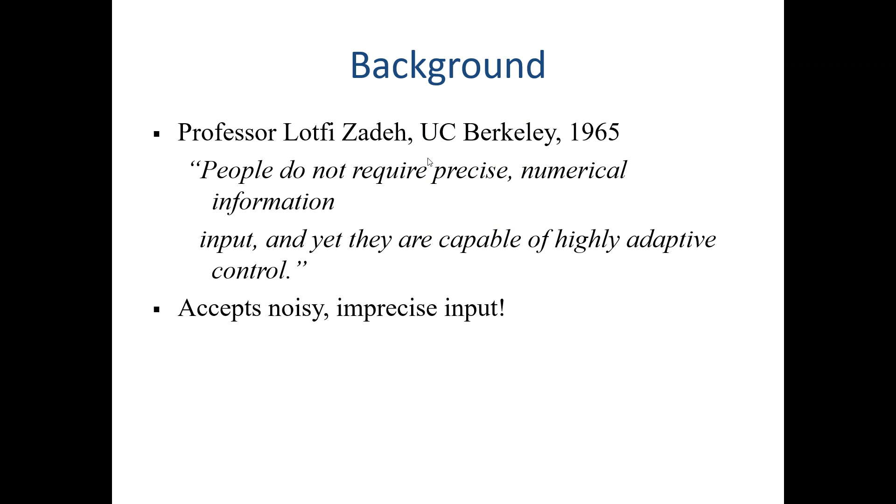As per the background, Professor Lotfi Zadeh of UC Berkeley in 1965, he was the author of fuzzy logic. Sabi niya, people do not require precise numerical information input and yet they are capable of highly adaptive control. So sabi niya, pwede raw tayo mag-accept ng mga noisy input, mga imprecise input, provided na meron tayong effective rules na implement for us to solve the problem. So yun na nga, kaya naisip niya yung idea behind fuzzy logic.

So let's define, ano ba ibig sabihin ng fuzzy logic? Pag sinabi natin na fuzzy, so not clear, distinct, or precise, blurred. And then yung definition ng fuzzy logic natin, a form of knowledge representation that is suitable for notions that cannot be defined precisely but which depend upon their context. So, ginagamit talaga yung fuzzy logic for nonlinear problems na mahirap i-solve linearly. Kaya po, meron tayong easier way to do that, which is the fuzzy logic.

So, ano po ba yung fuzzy logic? So, basically, fuzzy logic is a problem-solving control system methodology, and we make use of the linguistic or the fuzzy variables. Example, if the process is too hot and the process is heating rapidly, then meron tayong conclusion. So we have to cool the process quickly. So instead of using values, we represent that using linguistics or using fuzzy variables.

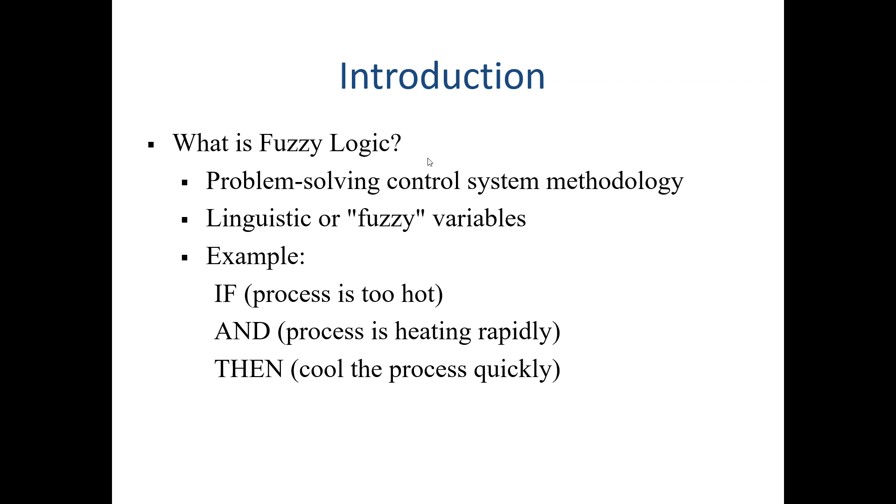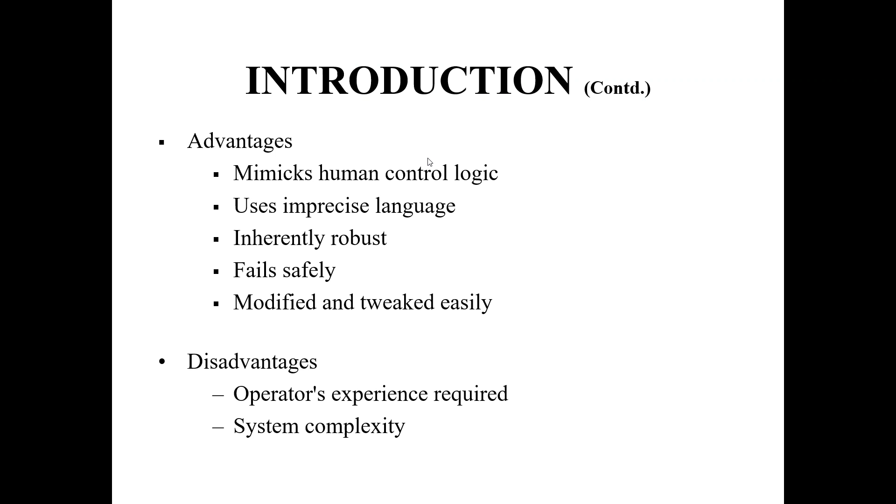What are the advantages? So basically, it mimics human control logic. It uses imprecise language, inherently robust, fails safely, and you can easily modify and tweak this one. For the disadvantages, kailangan dito ng operator's experience. Kailangan ng system complexity. So, kailangan mo talaga ng expert that you could ask or confirm whether okay na ba yung rules na atin pong iniisip.

Ito yung ating traditional representation ng logic. So, we make use of binary, di ba? 0 and then 1. So, in representation, yung snail, slow siya. So, ang speed niya 0. We could represent that as 0. And then, we have here fast for the cheetah that we could represent as 1.

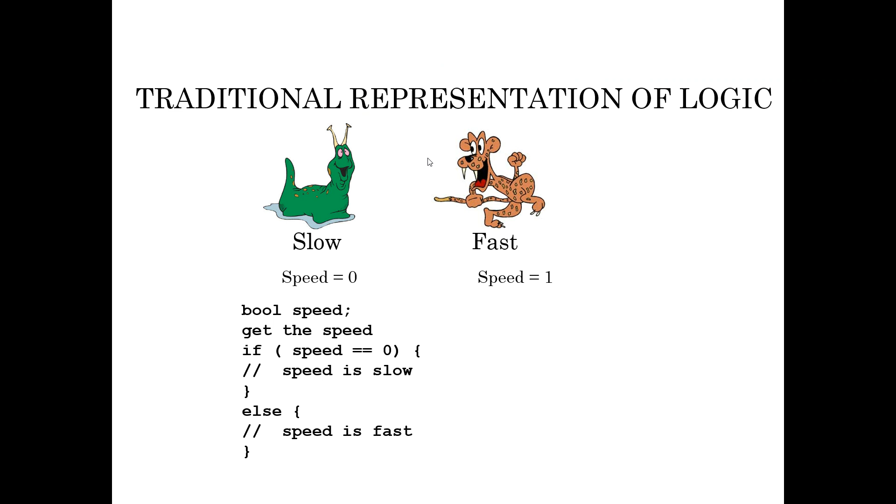So, kapag i-code natin yan, yung common sa atin, C or C++ or even Python, so i-declare natin yung speed as Boolean kasi it's a matter of 0 and then 1. Then we get the speed or we scan the inputted value of the user. And then we determine that if the speed is 0, so we just check the condition, then the speed is slow. Else, the speed is fast. So, ganun kasimple lang yung traditional representation natin ng logic.

So, in fuzzy logic representation naman, for every problem, we must represent that in terms of fuzzy sets. So, ano ibig sabihin ng fuzzy sets? So, this time, hindi lang tayo 0 and then 1. So, we could represent that into different linguistics like the slowest, slow, fast, and then fastest. So, pwedeng yung snail, ang kanyang category or range of values ay from 0 to 0.25. Then, syempre, yung turtle naman natin from 0.25 to 0.5. Then, fast yung dog natin from 0.5 to 0.75. And then, the cheetah, which is the fastest, from 0.75 to 1.

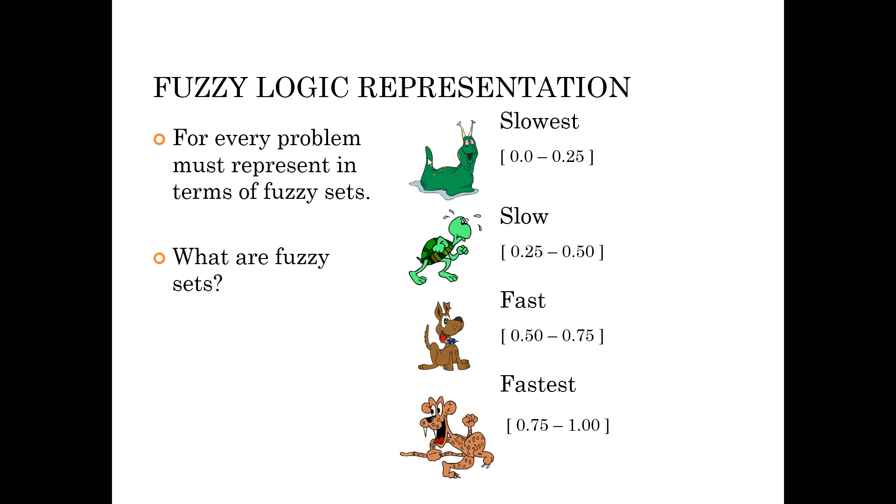So, if we are to make a programming language for this one, ganun din lang din naman yung representation. But this time, pwede natin na i-declare si speed as float, considering na hindi lang naman siya binary in nature na 0 and then 1, we still scan the input of the user, which is speed.

And then, this time, meron tayong range of values na gumamit tayo ng ladderized if-else. If the speed is greater than or equal to 0, and the speed is less than 0.25, so the speed is slowest. Then from 0.25 to less than 0.5, slow. 0.5 to 0.75, speed is fast. And then 0.75 to 1, the speed is fastest.

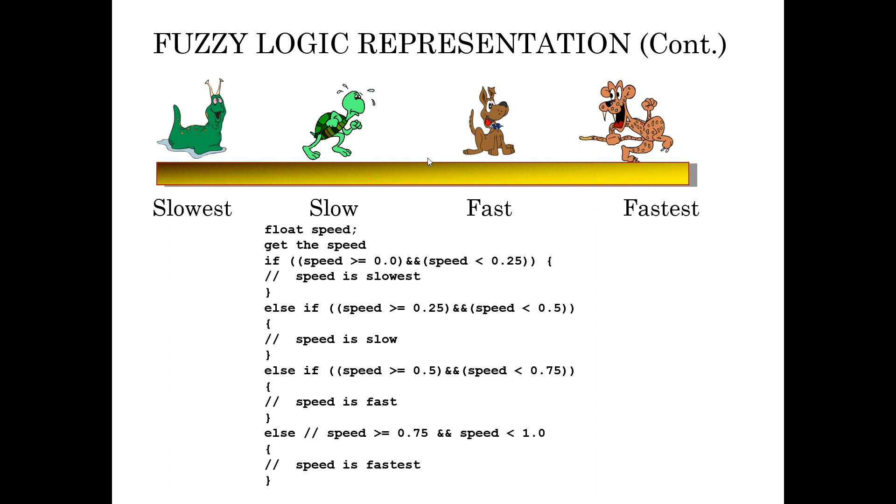So regardless of the programming language, pwede po natin gamitin si Fuzzy Logic. In our subject, since we're building model-based design, we'll try to use muna Fuzzy Logic Toolbox. So gagamit tayo ng MATLAB para i-implement si Fuzzy Logic in our 7th experiment.

So origins of Fuzzy Logic, so it traces back to ancient Greece. And then he was the first to publish the ideas of Fuzzy Logic. It was Lotfi Asker Zadeh. And I think he was the professor of my professor in De La Salle University when I'm taking my master's and doctorate degree. Naging prof niya to. Sa Europe kasi siya nag-doctorate.

And then in the Philippines, si Dr. Elmer Dadios, he was my professor and advisor also in Fuzzy Logic subject. Siya naman yung father ng Fuzzy Logic in the Philippines. And then we also have Professor Toshiro Terano in 1972. He organized the world's first working group on fuzzy systems.

Kaya nga marami na ngayon na mga organizations or conferences na related sa fuzzy systems. And isa ako sa mga nai-invite na maging reviewer ng mga papers na related sa fuzzy logic. I even presented papers naman related to that.

And then the FL Smidth Corporation in 1980, they were the first to market fuzzy expert systems. I don't know if you have seen already washing machine. Yung washing machine namin na isa, nakalagay doon Fuzzy Logic. Ibig sabihin, yung idea behind the algorithm in that washing machine is using the concept of Fuzzy Logic.

Ngayon, i-compare natin, there are a lot of computational intelligence. Normally, pinag-aaralan ito kapag nag-graduate school po tayo. So dito gusto ko i-compare yung Fuzzy Logic with the neural networks. So how does a neural network work? Tandaan po natin that both model the human brain. Both the Fuzzy Logic and the neural networks are both used to create behavioral systems.

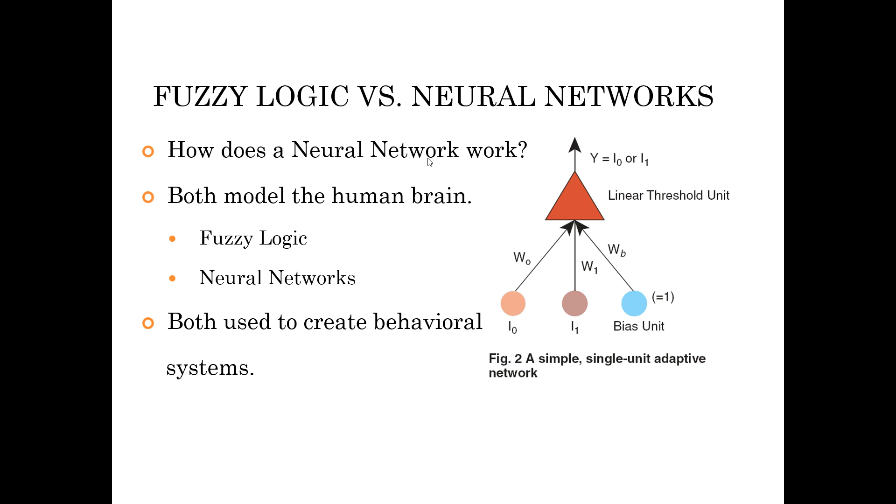For Fuzzy Logic naman, it's more of the rules. Iisip ka ng rules, aralin mo yung situation ng sistema. Pag clearly naintindihan mo na yun, you have to ask for the expert. And then, tutulong yung expert sa'yo para gumawa siya ng rules needed for your Fuzzy Logic.

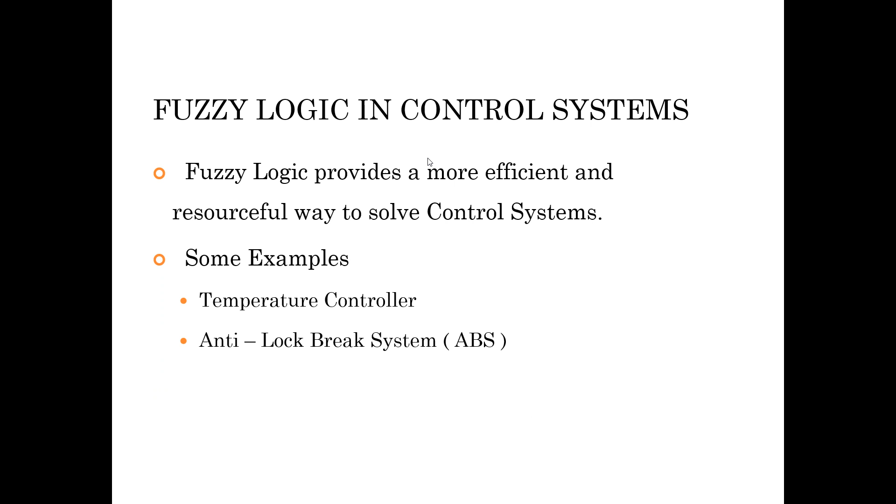So, yung Fuzzy Logic, pwede rin gamitin for the control system. It provides a more efficient and resourceful way to solve control systems, examples of which yung temperature controller and even the ABS or the anti-lock brake system. Common use po ito sa temperature controller. Example, we have the problem. We need to change the speed of a heater fan based off the room temperature and humidity, di ba?

Ngayon, mainit. So, kailangan ma-measure mo yung temperature at saka humidity doon sa room before you could adjust automatically yung ating heater fan or even the air conditioning system. A temperature control system could have 4 settings. In our case, we have the cold, cool, warm, and then hot. Again, ikaw po uli ang pwede magdagdag niyan. Pwede mo siyang dagdagan na very cold, cool, warm, hot, very hot.

Pwede po yon. So humidity can also be defined using 3 classifications, low, medium, and high. Again, pwede po yung magbago. Depende po yan sa design mo. So considering this classification, we can define now the fuzzy set. So in our case, we have the temperature.

Yan, the temperature is cold, cool, warm, and then hot. And then we have classifications for humidity, low, mid, and then high. And then yung output natin dito is the fan speed. Ang ibig sabihin lang yan, if the temperature is cold, and the humidity is low, then we set the fan speed to medium.

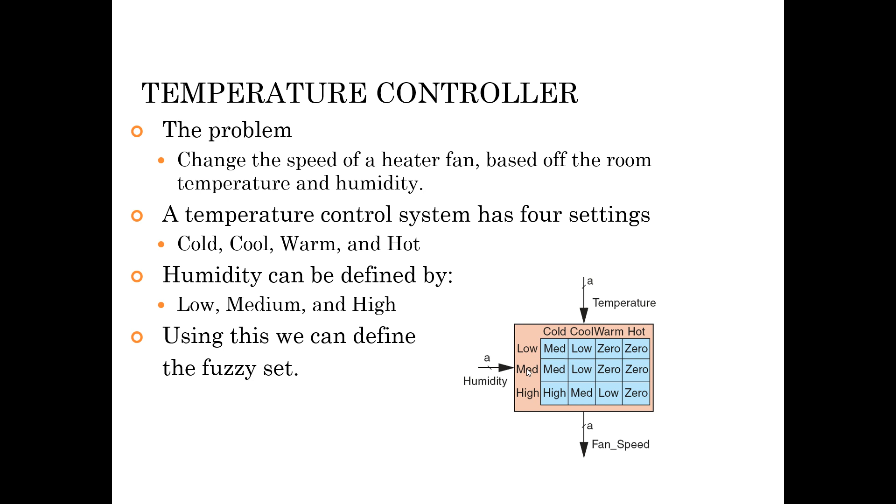Pero kapag the temperature is hot and the humidity is high, then we set the fan speed to 0. So, ang tawag dito sa nakikita po natin na table is Fuzzy Associative Memory Matrix or FAM matrix. So, yan na yung rule na na-create natin na hindi mo siya inisip, nonetheless, you ask someone na expert in the temperature control system.

So, ano po ba yung benefits ng using Fuzzy Logic? So, kita natin dito yung steps, yung traditional approach that we're using. Of course, lahat naman ginagawa natin yan. We understand the physical system and then the control requirements. Pero in the traditional practice natin, kailangan pa natin mag-develop ng linear model of plant sensors and then actuators. Di ba meron kayong subject na feedback and control system? Malamang familiar kayo pag sinabi kong sensors, actuators, and so on.

And then, we determine a simplified controller from control theory. So, medyo mahirap yan. Kailangan kang umisip ng control theory na applicable doon sa specific design that you are trying to build. Pwedeng proportional integral, proportional derivative, proportional integral derivative. And then, mag-develop ka ng algorithm for that controller and then you simulate, debug, and implement design. In most cases, kailangan mong gumamit ng differential equations, kailangan magkaroon ka ng advanced math, kailangan mag-derive ng equations para ma-solve mo yung problema.

Pero using Fuzzy Logic, kinombine natin yung development ng linear model of plant sensors and actuators, simplification of controller from control theory, and developing an algorithm for the controller. So, ang gagawin lang po natin, we need to design the control using the Fuzzy rules. And then, syempre, we have to fine-tune our rules. Kung enough na po ba siya, we simulate, we debug, and we implement the design. Ganun po ka-simple at ka-usable si Fuzzy Logic.

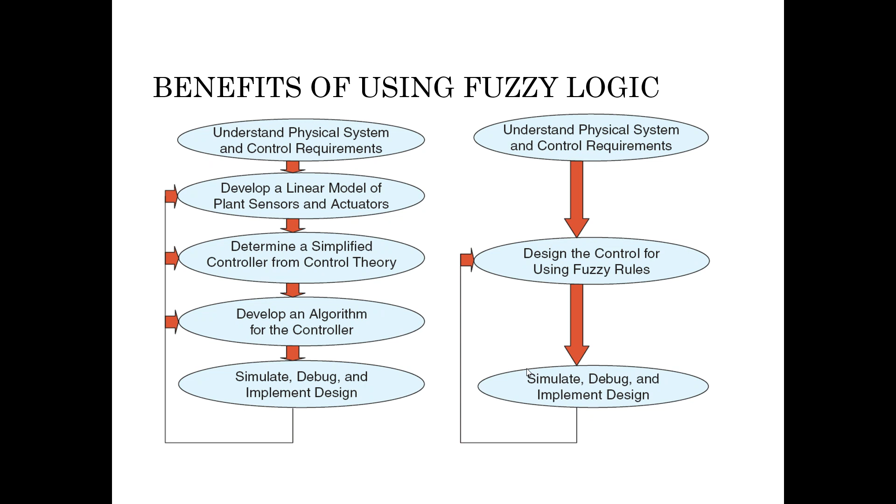So, another example, this time, for the anti-lock brake system or the ABS. So, this is nonlinear and dynamic in nature. So, kaya kailangan talaga natin ditong gumawa ng equations or gamitan siya ng Fuzzy Logic. So the inputs for Intel Fuzzy ABS are derived from the following. So we have the brake, the four-wheel drive, the ignition, the feedback, and the wheel speed. And then we have here the diagram for that. So basically those 5 items are the data input. And then ipoprocess natin siya using the main program, using the Fuzzy Logic Inference Engine.

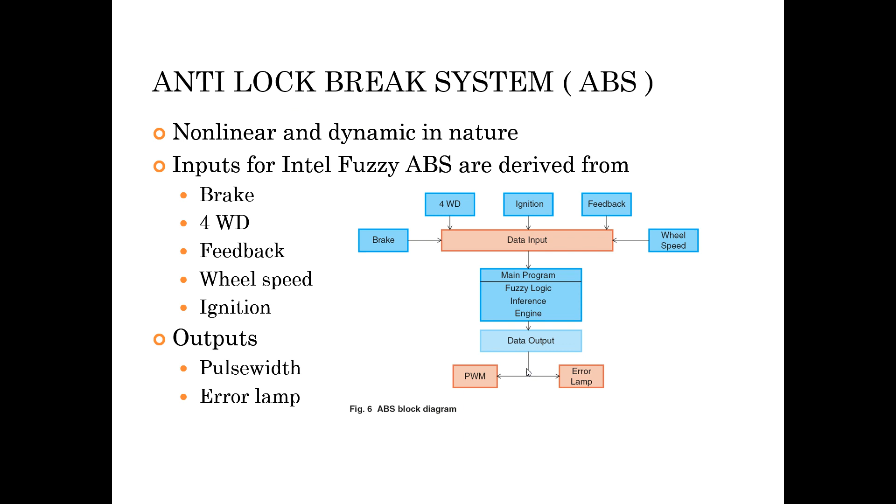So we have commonly used two, Mamdani and Sugeno. In my research works, I have used both naman, pero common na ginagamit ay Sugeno. In our case, gagamitin po natin ay Sugeno since we are just starting with Fuzzy Logic. Then we produce the data output. In our case, ang outputs po natin, pulse width modulation or the PWM and the error lamp. Yun yung i-control natin using the rules.

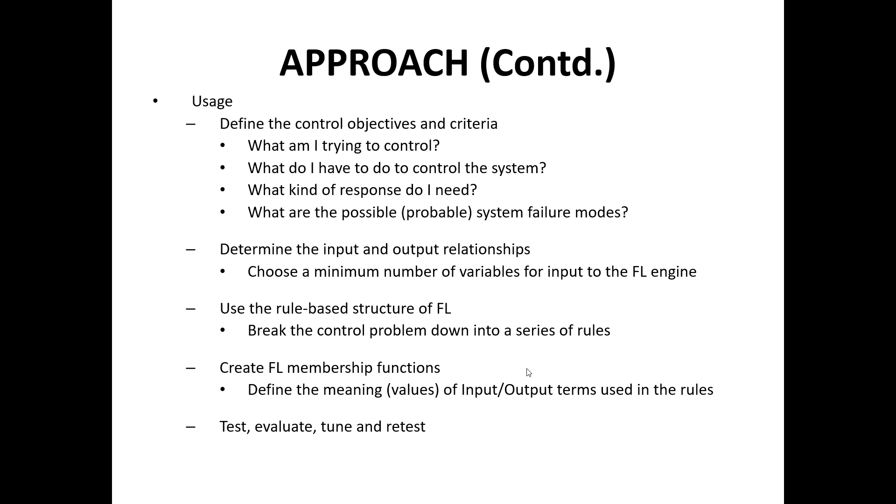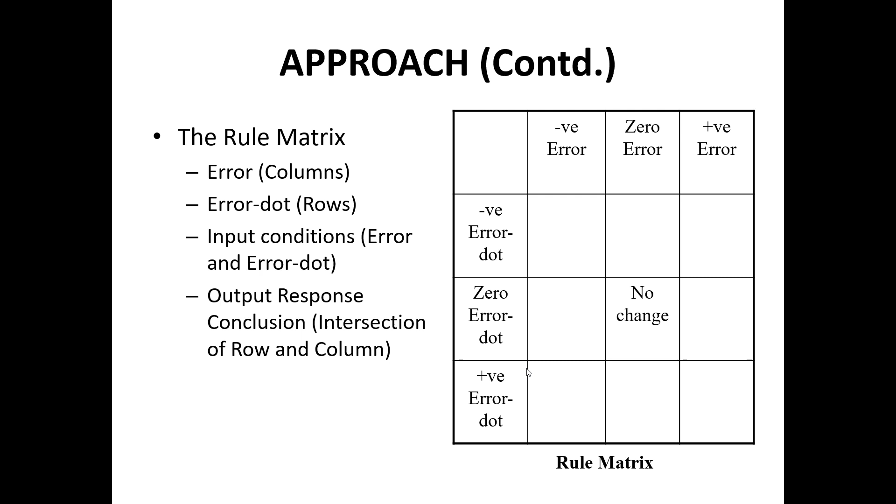And then gagawa ka ng rule matrix. Example of which, we have the error for the columns and the error dot for the rows. And then input conditions, error and error dot, output response, conclusion, intersection of row and column for the rule matrix.

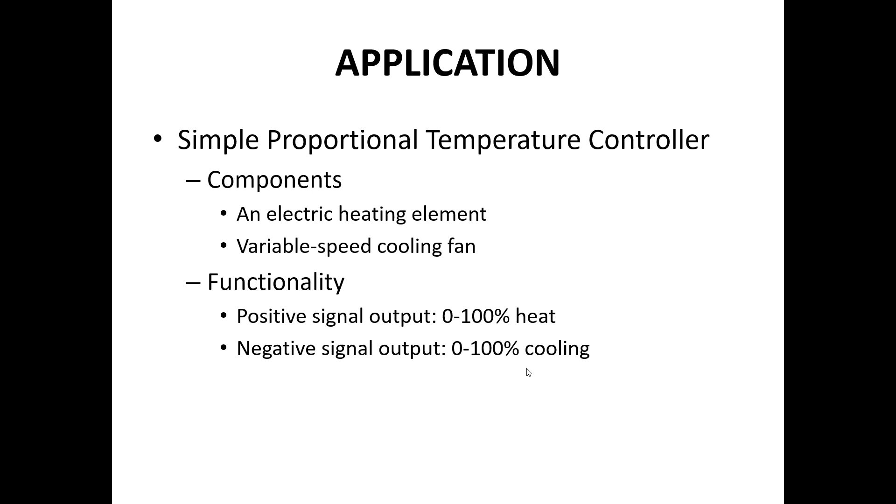As for the application, simple proportional temperature controller, so components of which an electric heating element, variable speed controlling fan or cooling fan, functionality, positive signal output 0 to 100% heat, negative signal output 0 to 100% cooling. So this is a block diagram of the control system for simple fuzzy logic control system.

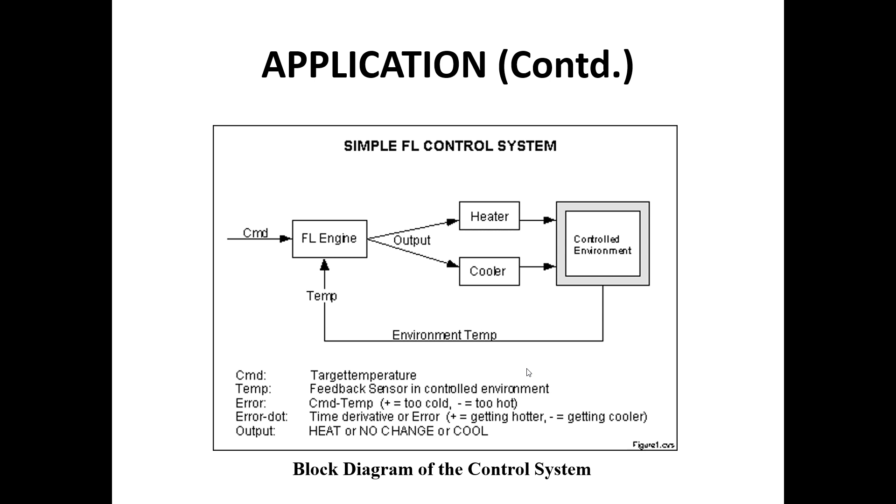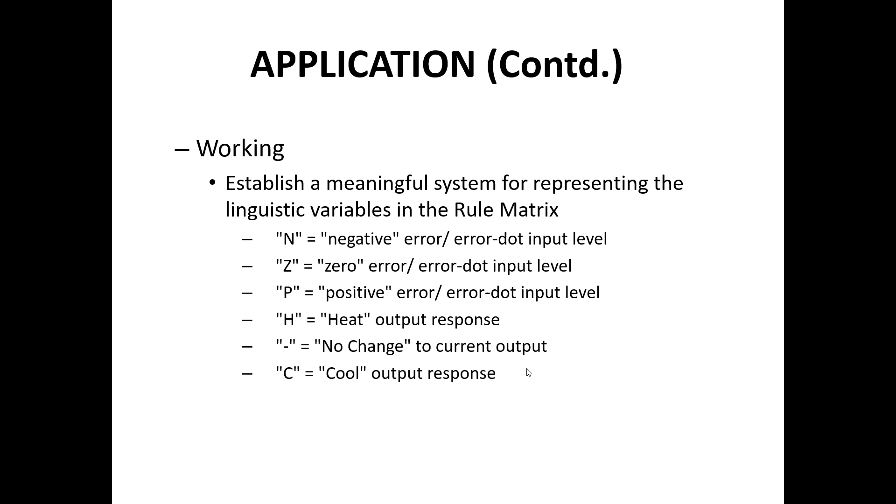As for the working, so we have to establish a meaningful system to represent the linguistic variables in the rule matrix. Pwede kang gumamit ng mga variable like n, which is ibig sabihin negative, p for the positive, h for the heat, dash for the no change, and then c for the cool.

So, we also have to define the control objectives and criteria. Ito yung mga sinabi ko kanina, what I'm trying to control. Example, what I'm trying to control, system temperature.

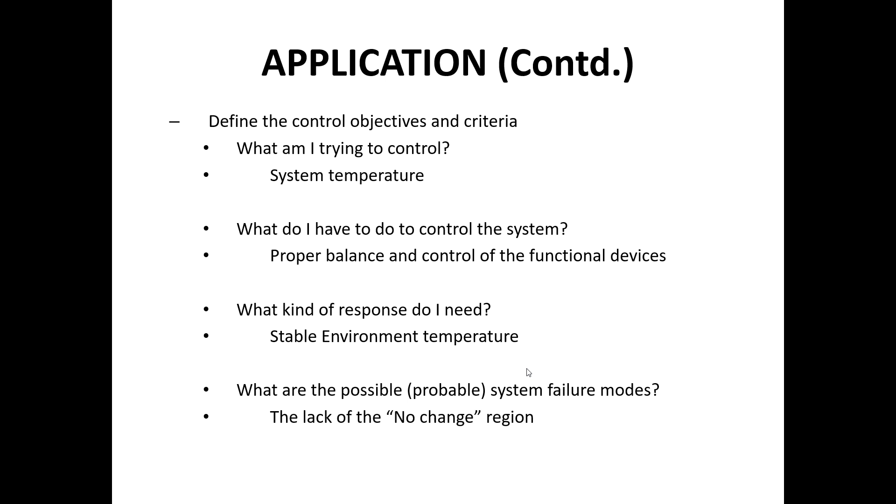What do I have to do to control the system? So, proper balance and control ng functional devices. Ano bang klaseng response ang kailangan ko? Stable environment, temperature. Possible probable system failure modes, the lack of the no change region. So, what is being controlled and how?

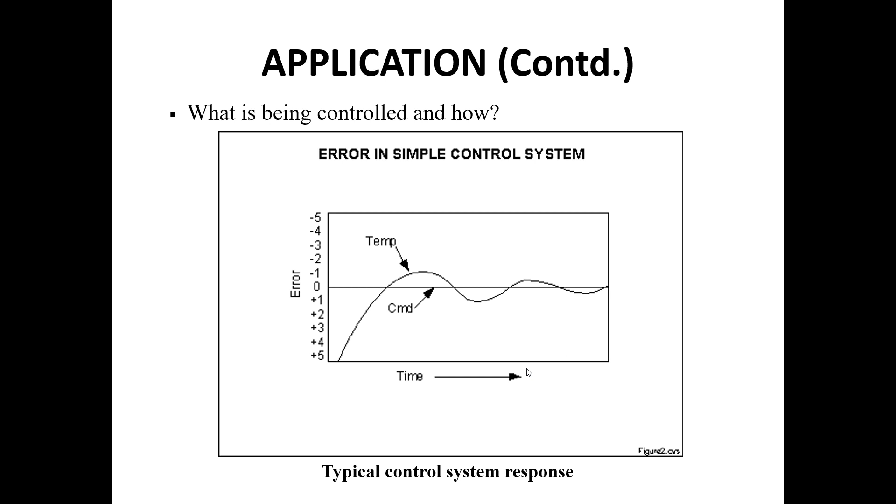So, this is the typical control system response. Again, the CMD is the target and the temp is the temperature over time.

So another example. So this time we have to determine the input and output relationships. So we define the minimum number of possible input product combinations and the corresponding output response conclusions. So ito ay reference sa table kanina.

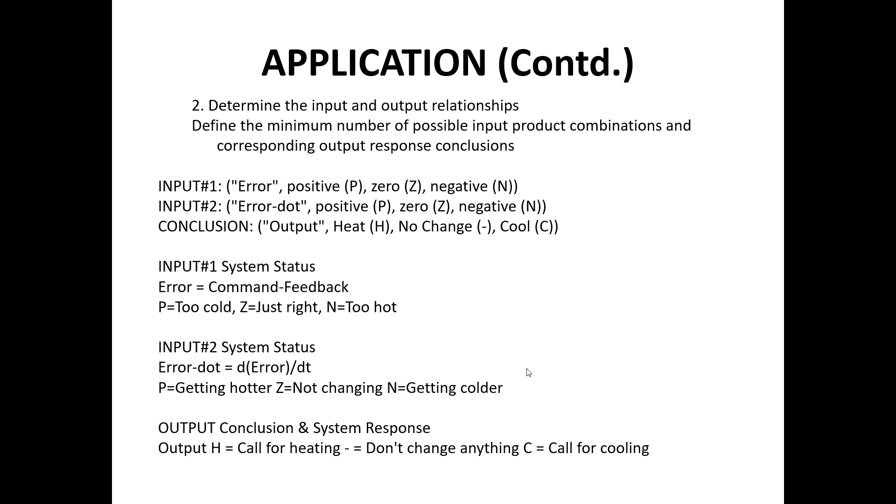We have the first setup input with reference to different classifications, error, positive, 0, negative. And then for the error dot that we have positive, 0, and then negative, then conclusion natin for the output, heat, no change, and then cool. Same is also applicable for other examples or representation.

Then we make use of the rule-based structure of the fuzzy logic. Etong nakikita natin na set of rules from 1 to 9, reference yan dun sa fuzzy associative memory matrix na pwede natin gawin mamaya sa MATLAB Fuzzy Logic Toolbox.

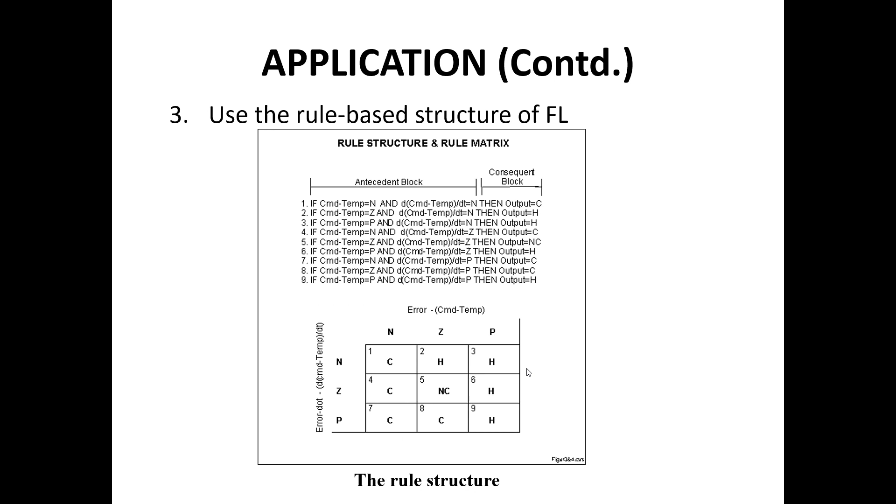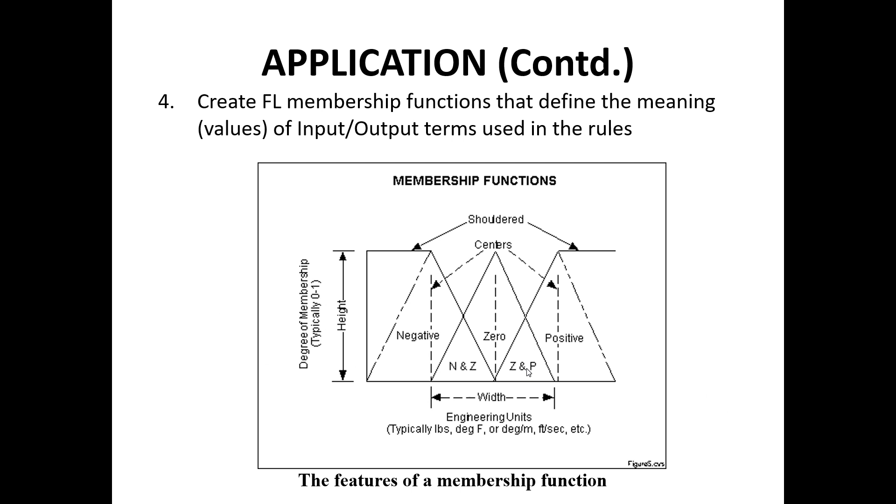And then create a fuzzy logic membership functions that could define the meaning or the values of the input and output terms used in the rules. So ito na yung gumamit tayo ng triangular membership function so that we could represent yung ating rules na sinet kanina into fuzzy sets.

And then I guess that's it. So before I end the recording, I'll be explaining to you some of the fuzzy logic endeavors that I have done for the past years.

One of the things I did, I think this is one of the first outputs presented in TENCON 2012 in Cebu: Fuzzy Logic Control of Water Quality Monitoring and Surveillance for Aquatic Life Preservation in Taal Lake. I actually went to Taal Lake, coordinated with BFAR, and made a Fuzzy Logic control to determine the quality of water.

Another one presented in the 8th ERDT Conference 2012, also in Cebu: Water Quality Assessment Using Backpropagation Neural Network for Aquatic Life Preservation in Taal Lake. So for this one, using Fuzzy Logic, I applied a neural network, and I also used MATLAB for that purpose to counter-check the results I got from the Fuzzy Logic method.

This one is in 2013, presented in the 6th International Conference on Humanoid, Nanotechnology, Information Technology, Communication and Control, Environment and Management, or HNICEM 2013. I used Fuzzy Logic to derive and simulate a 3-variable solar water heater. The tool I used here was the MATLAB Fuzzy Logic Toolbox, which I will show you later. For the earlier ones, I actually derived the Fuzzy Logic using Excel macro. I really derived it myself. It's actually fairly easy, I just applied Fuzzy Logic to it.